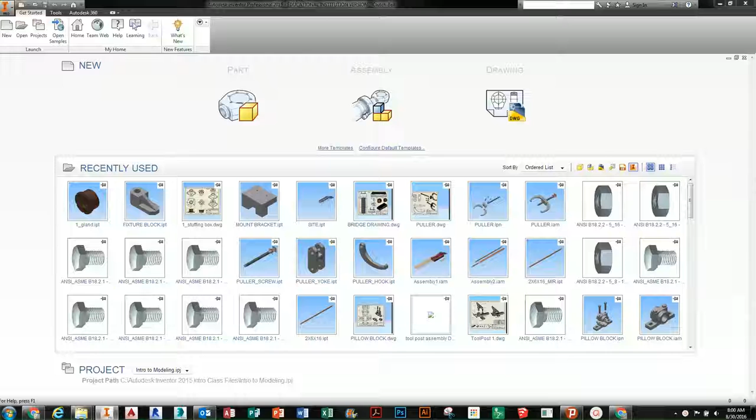Alright, today we're going to look at practice 17A and 17B, assembling an engine. And what we're going to do is start with a standard inches assembly file.

So we're going to go Start, New, we're going to find our assembly, and it's going to be standard inches right here.

We're going to create, and we're going to place the rblock.ipt. So we're going to go up here, you should have place. Go into our engine assembly, and we're going to place the RBlock, it's the rotary block. And you'll see we bring it in. Don't do anything just yet.

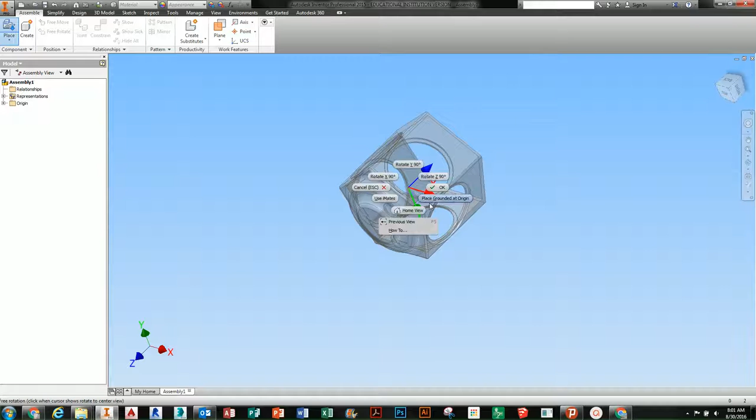What you're going to do is right click on the model, select rotate X90. Right click on the model again, say rotate X90 again. And then we're going to ground that at the origin by right clicking and selecting origin, and once we've placed one, we say OK. So we've got a nice basic grounded piece.

Now what we're going to do is, you've noticed when we did that, it has a pin on it. The pin on that little folder means it's grounded at the origin.

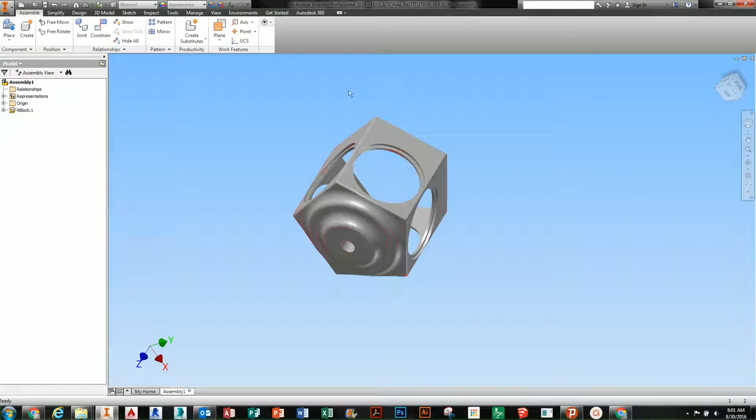So the next thing we're going to do is we're going to place the cylinder, the rcylinder.ipt, and we're going to rotate the X90 twice and place it just to the side. I'm going to right click to flip it once, right click to flip it again, and I'm just going to place it over here, sort of how it looks in the book. And then I'm going to say OK.

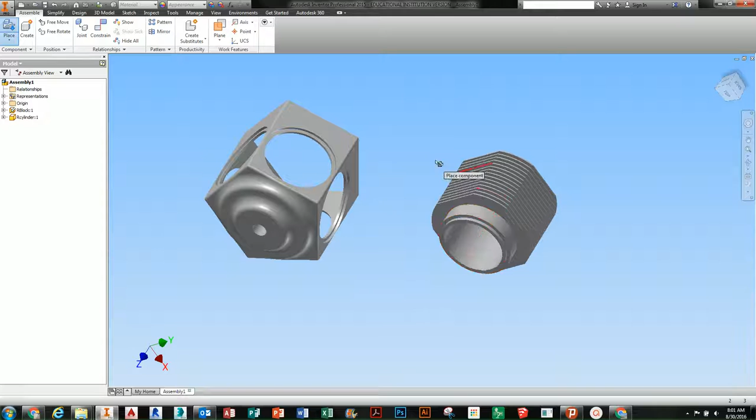And the next thing I want to do is I'm going to go to the Assemble tab, right under the Assemble tab, and I'm going to click Joint. When you click Joint, it shows you this kind of dialog box. And what we can do is turn this little guy on and off to toggle that dialog box.

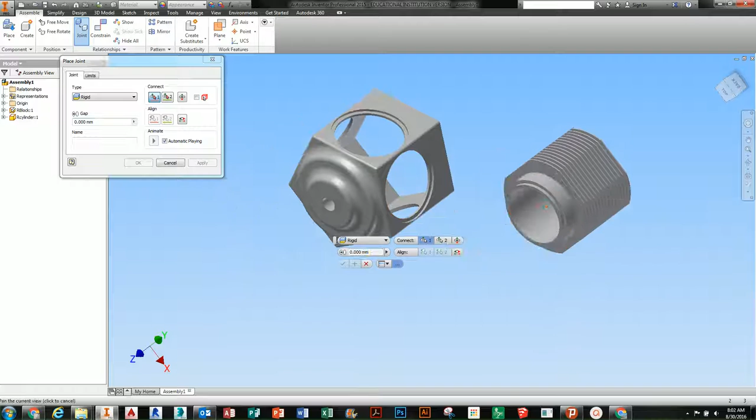So we're going to select a rigid joint, and on the R cylinder component, which is the first reference, you always click what you want to move first. We want to move the cylinder because this is grounded, it's our base.

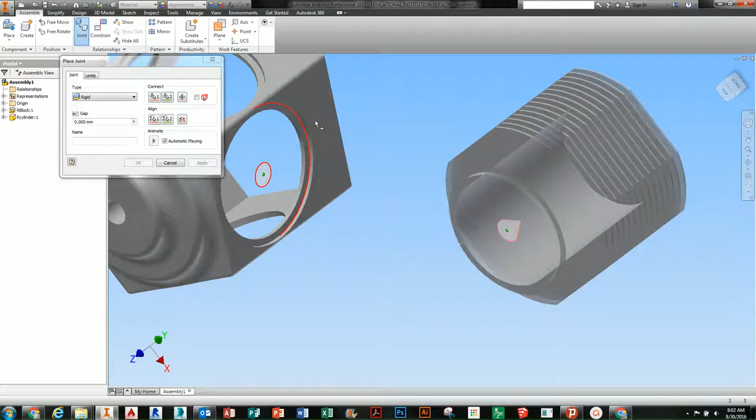We want to move the edge of this lip right there, and we want to move that to the edge. Oops. And now if something happens, you just undo it and then do it again. That's going to happen from time to time.

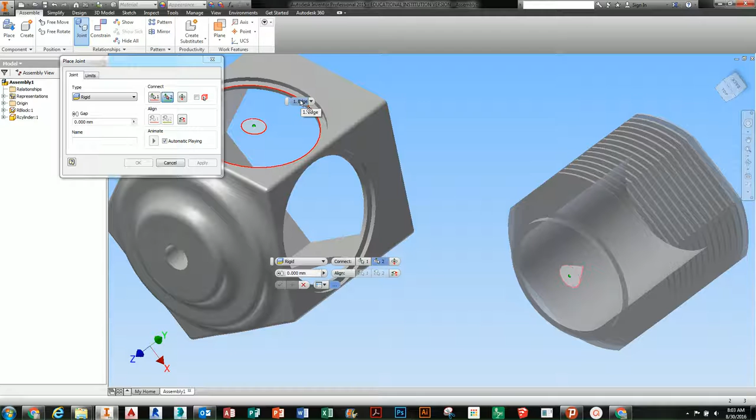We go back to our rigid joint. We're going to click that edge to this inner edge. This is where you got to really pay attention. And we're going to move that there. Now notice that should be flipped. So what we do is click off there, and that will flip the dimension.

And then we can say OK, or check the checkbox in the mini toolbar. I always keep my bigger dialog box open just in case.

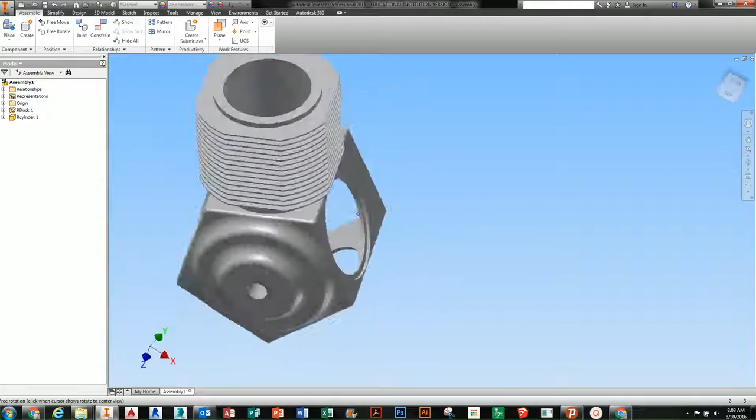Now, the next thing we're going to do is, notice next to our rigid, our R cylinder, when you expand the part, you get in a rigid joint. Because if you ever want to open that back up, you can always double click and take a look at the joint itself.

So now the next thing we're going to do is we're going to go place the crankshaft and the master rod. So you're going to hold Control on your keyboard and select master rod and select the crankshaft, and say OK. Now notice both components come into the assembly.

And we're going to right click and rotate X90 twice. All that does is put them over here to the side some. We're going to just place them over here, and say OK once. We're going to go back and we're going to place the R block.

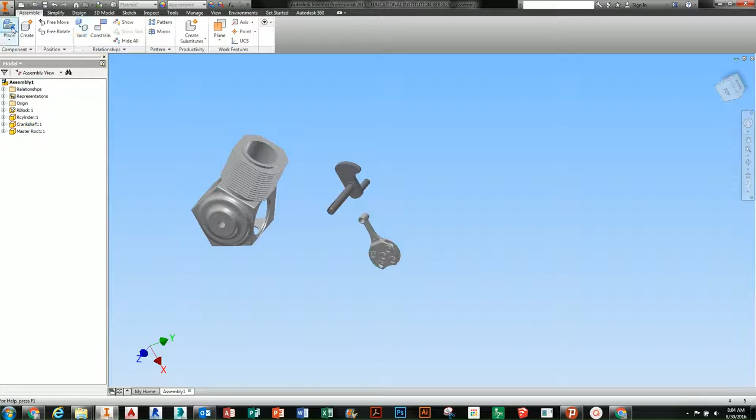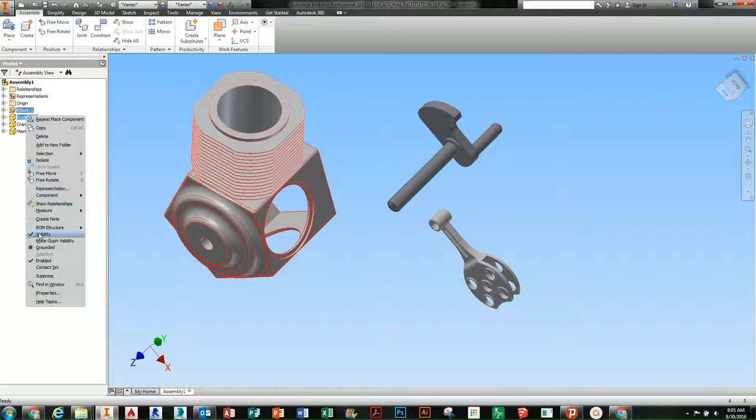Actually, what we're going to do is we need to first edit this assembly, so we're going to hide some of this stuff for the meantime. So if we go over to R cylinder and R block and hold Control down and pick both of those, you can right click and turn off the visibility. Notice this check mark here. So we can go and just focus on this sub-assembly.

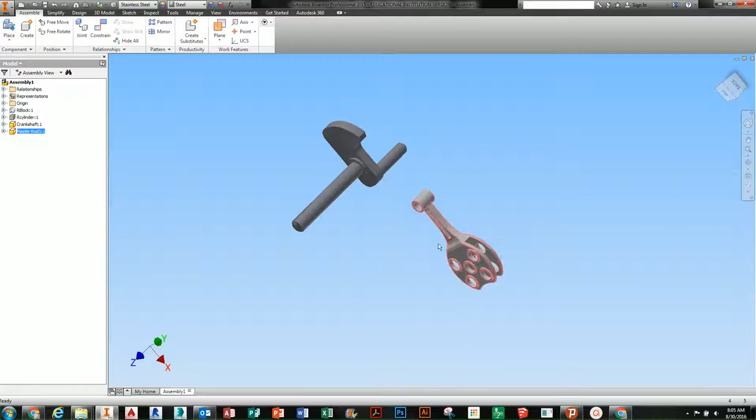Now we're going to hold down the left mouse button on the master rod component, which is this, and notice we can move it around. What we're going to do is try and move it sort of like they show in the picture, and that's sort of like how they have it.

And we're going to go to the Assemble tab, and we're going to click Joint. We're going to click a rotational joint. And the first thing we want to do is select on the master rod.

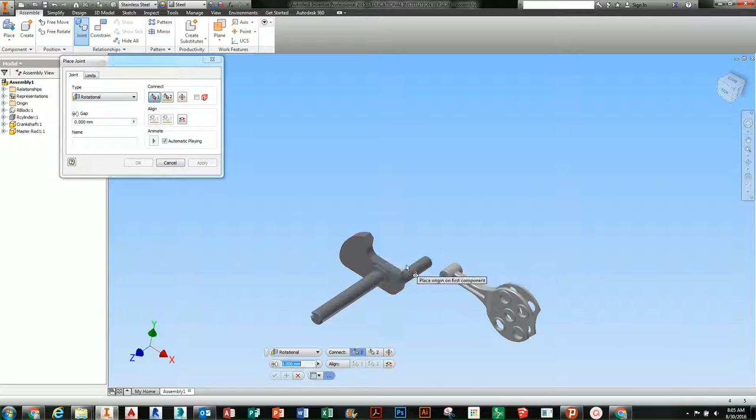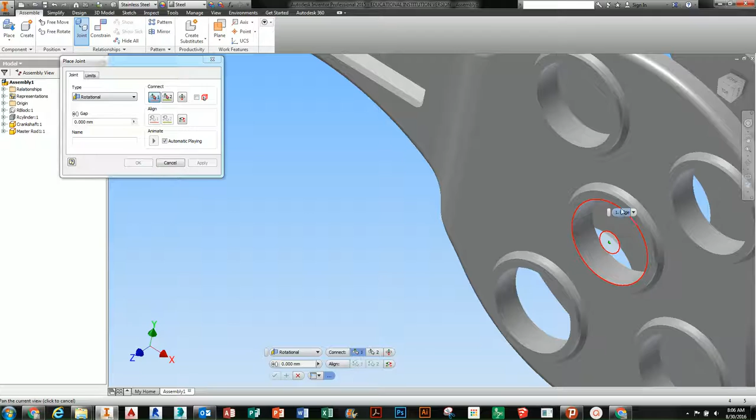Right, the master rod is here, and we're going to select this edge on the outer ring. Right, there's this edge here. Let's try this one. We're going to move that to the center point reference here.

And what that does is make a rotational joint around there. Now once we've made that rotational joint, we're going to say OK.

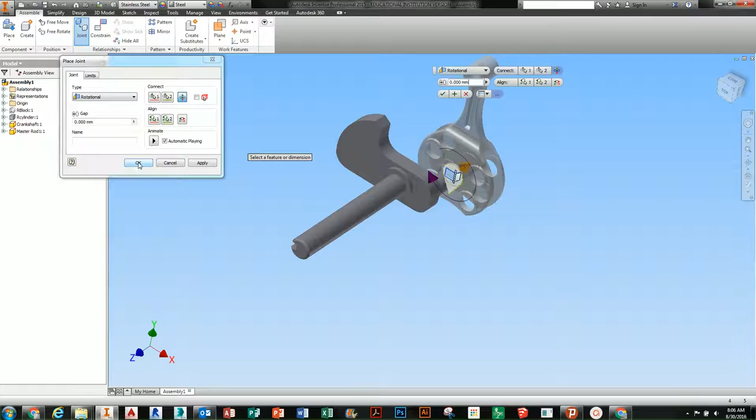And then notice once we've done that, you get a rotational joint underneath your crankshaft and master rod. Now we could flex that to make sure it doesn't change. Alright.

Now the next thing we're going to do is select the crankshaft in the graphics window or in the model browser, and we're going to ground that component. So let's go to the crankshaft, right click on it, and go to grounded, and what that's going to do is create a parent to this master rod.

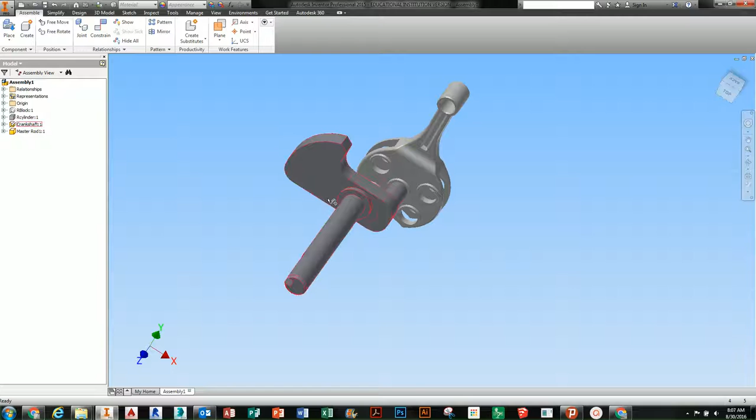Now the next thing we're going to do is select the master rod component and make sure that it's still got some of that rotational freedom. So what we did there is we anchored this guy so that this one knows to spin around the other one, right? It creates a hierarchy between the two parts.

So now let's go ahead, we're going to place an instance of the piston head pin and the piston head. I'm going to hold control and grab both of those and place them off to the side.

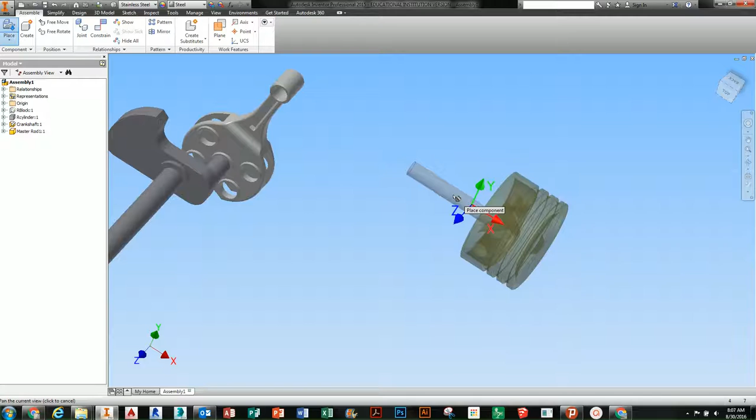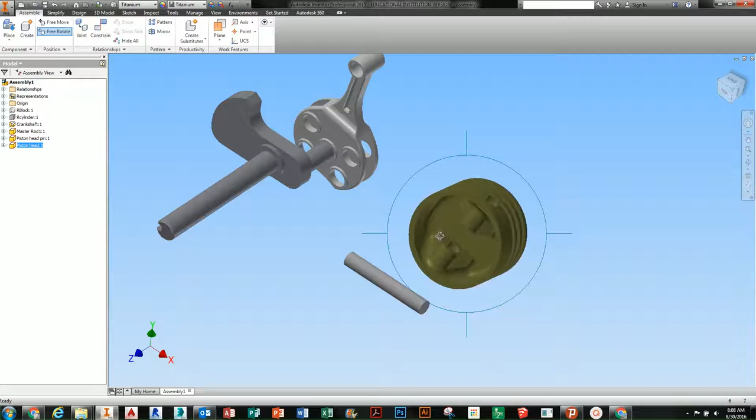And I can rotate them a couple times. Say OK. Notice my pin's over here. And if I don't get them how I want in the parts, I can use a quick free rotate to kind of make it look the way we want. Then I hit escape, and then I can do a free rotate, and we can turn this guy to be looking sort of how they want.

Alright, now once we've got that, we're going to go to joint and select a rigid joint. And what we're going to do is select the midpoint of this pin, and then we've got to place it between this cylinder that runs through here. Now this is where you got to be careful, because we want to right click in the graphics window, and we need to place the center of this between the center of those two surfaces. So we go between two faces, click that face and that face, and then we're going to say apply.

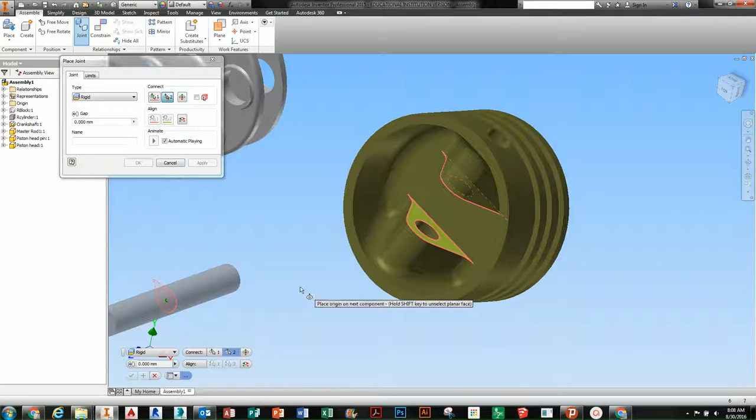And notice it applies those, slides the pin in between as I click to complete the joint.

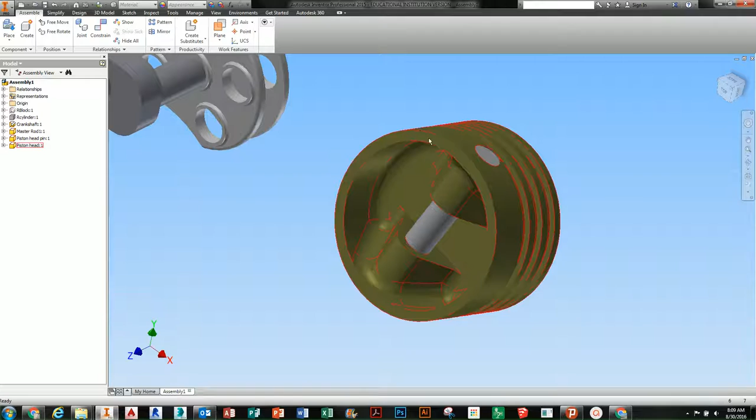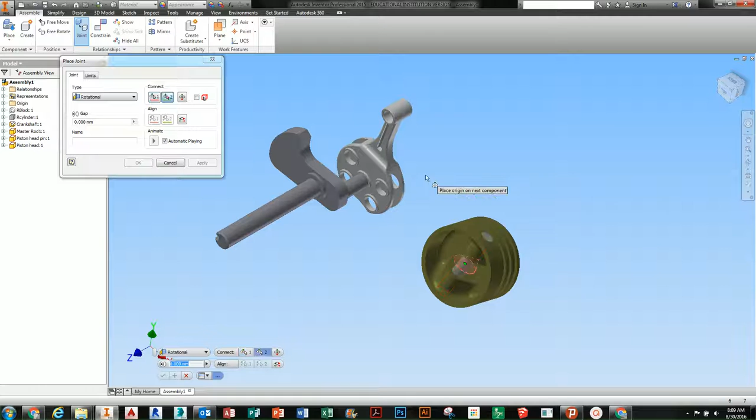Now the next thing we're going to do is a rotational joint that's going to attach this piston head and pin to the top of this master rod. So I'm going to go to joint, select type rotational, and I want to first select this center point of the piston pin again, the piston head pin, and then connect it to the center of this surface, this object.

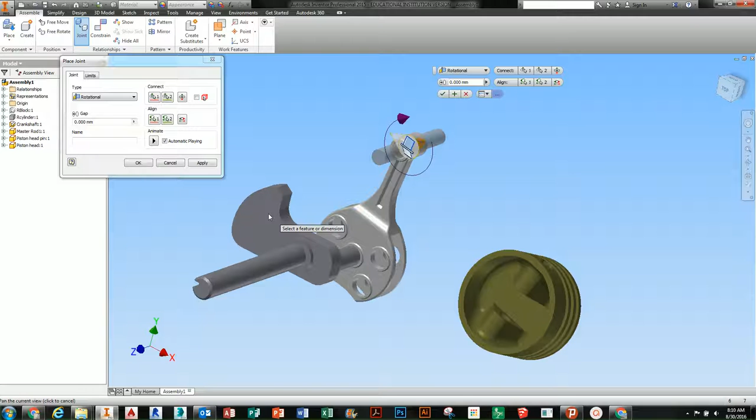Now notice when I moved that, it broke the reference between the two, until we say OK. Now once we say OK, you notice I get my component back in shape.

Now select the piston head. We notice it's got some freedom there. It can rotate anywhere it likes.

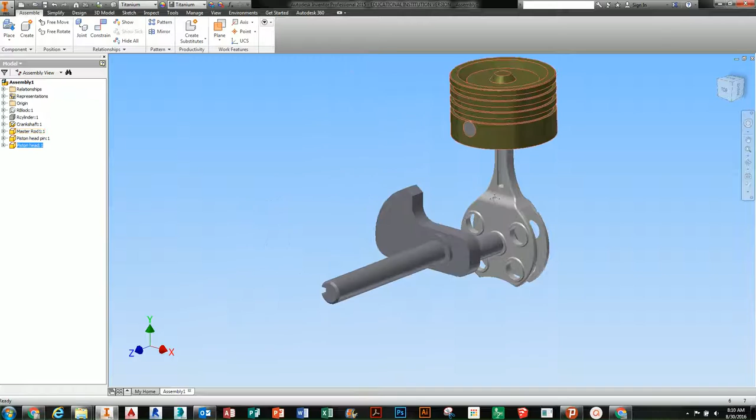Now let's go and turn back on our block, right? That block that we hid back here a long time ago. We're going to hold Control, pick both of those, and turn on our visibility.

Alright, now we're going to select the crankshaft component in the model browser, right click and clear the grounded option. So where we grounded this guy, this crankshaft, we're going to unground it, so now it can move around freely, because it's going to need to be added to the assembly.

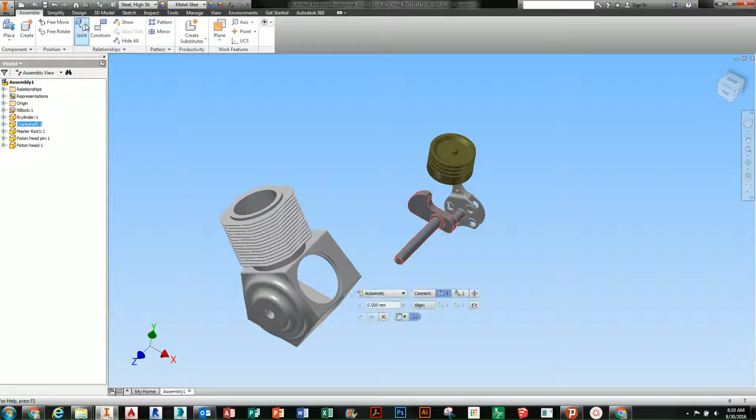So we're going to click Joint, and this time go Cylindrical Joint, and select the center of this ring on the outer edge, right? So we're picking this edge of the piston ring.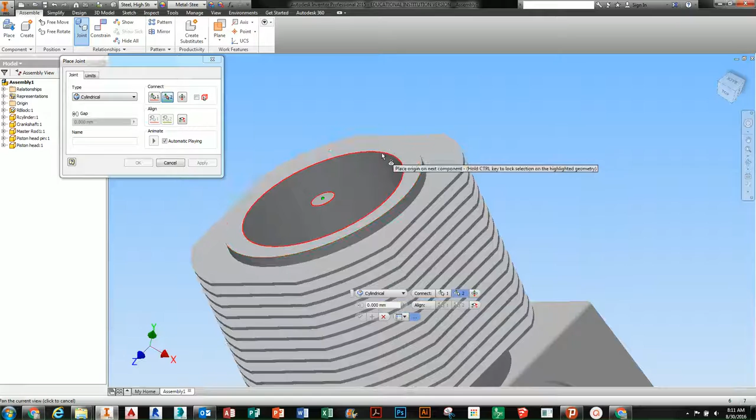Wait, we could do this one. And we're going to move that to match the outer ring here. And when we do that, your piston aligns. We check mark, say it's okay.

And then what we do is we just check that this piston doesn't go anywhere, right? This thing's going to break everywhere, but we'll fix that momentarily.

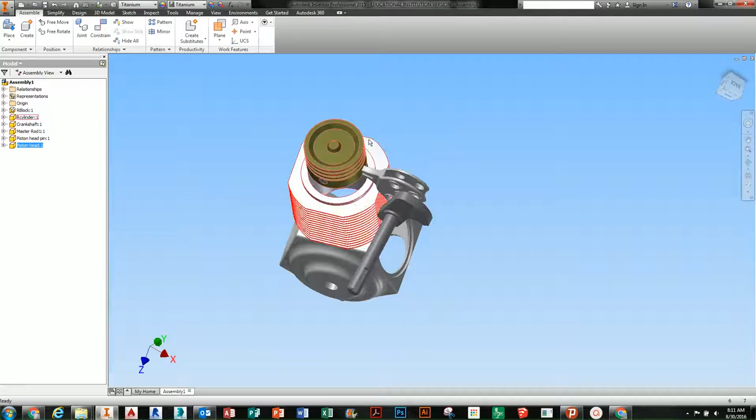Alright, now the next thing we're going to do is click Joint and make a cylindrical joint on the crankshaft component, which is this edge here. We want this edge to meet this edge. Let's see what we get. So we create this kind of condition.

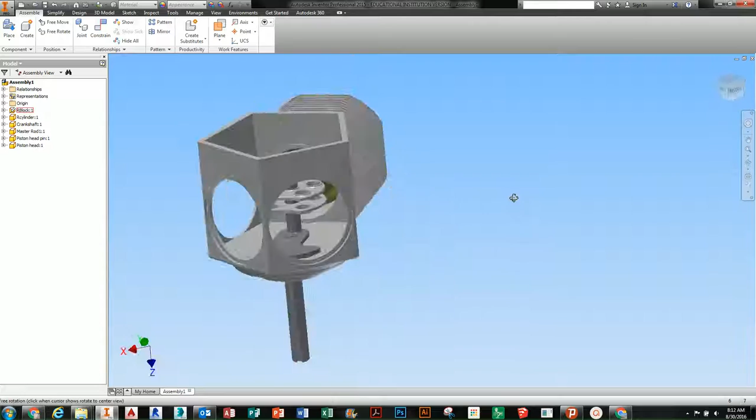And we want to say check mark. Let's see what we get. There we go. Now our piston is locked in, right? Our crankshaft is locked in.

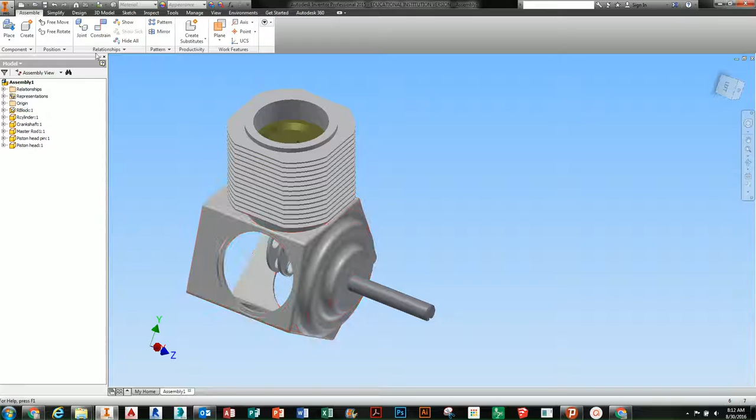Now the next thing we're going to do, and we're always going to drag and double check, make sure our degrees of freedom are appropriate, right? This thing should be rotating or doing something of the sort. And we're going to place an instance of the hub and shuttle into the assembly. So let's go place. I'm going to come back here, pick hub and shuttle, and I'll place the hub off to the side.

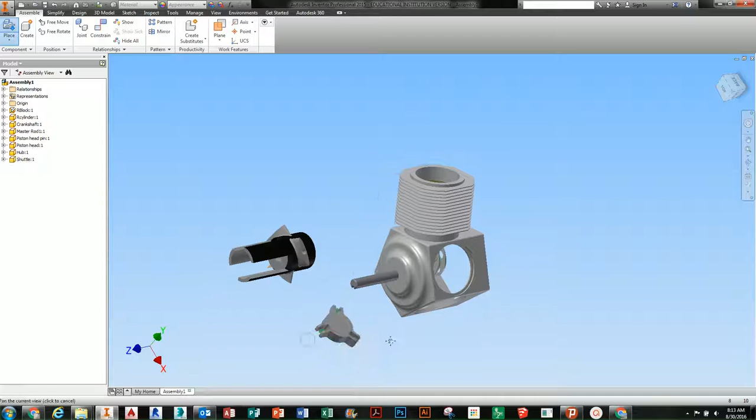Let's see, the picture sort of shows it like this. And I'll say OK, and then I'll place a copy of the shuttle, and I'll rotate that a little bit to make it look like they did in the picture.

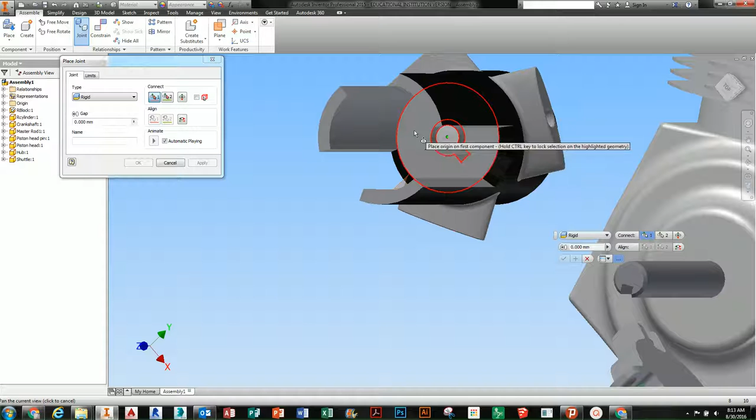Now we're going to make a rigid joint. On the hub, on the first reference, which is this thing, the hub, we're going to select that center surface right here. We're going to move that face to match the end of our assembly here. And so what that does is creates a joint of the hub to the crankshaft.

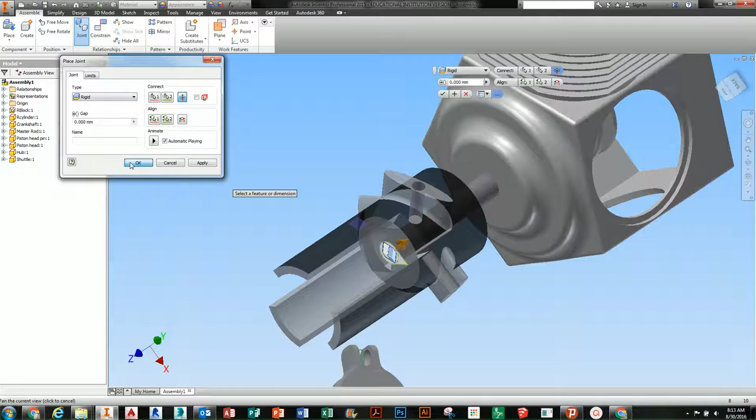Now we say OK. And we can actually notice that now this cylindrical spin activates the piston.

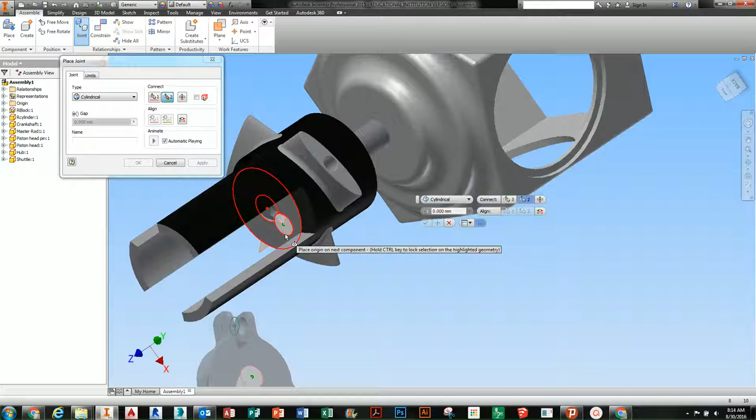The next thing we're going to do is initiate the cylindrical joint connection. Joint, cylindrical. We're going to click on the shuttle right dead center on this face, and we're going to move it dead center to the hub. So that would be just like that there. Notice it just moves it along.

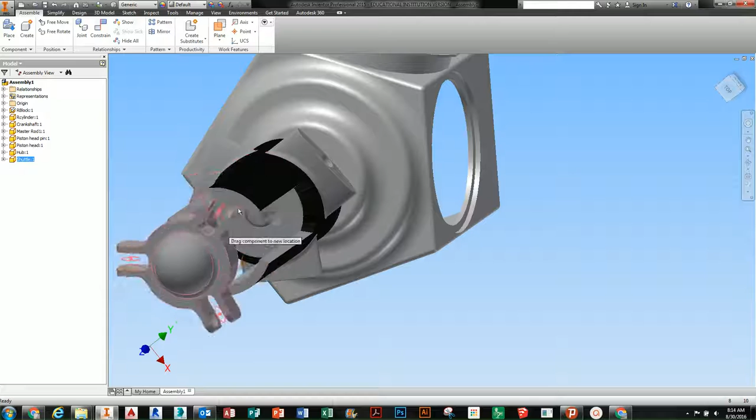We can say OK. And now notice this is clashing, right? Because this material is cutting into the other material, but we can still spin it, and this can spin too. We'll fix that momentarily when we create some additional constraints.

So now what we're going to do is make a few constraints instead of joints. In the Assemble tab, we're going to go to Constrain. Your constraint dialog box looks as such, and we're going to click Angle Constraint.

And what we're going to do is remove all that rotational freedom from this shuttle component. We don't want it moving around, we want it to sit still. So we're going to go angle, and then we're going to click directed angle.

And we're going to expand our hub component over here. Notice there's a work plane in here already. That work plane is what we're going to select first. And we're going to align that work plane to the origin of the YZ. And now what that does is create that angle constraint there.

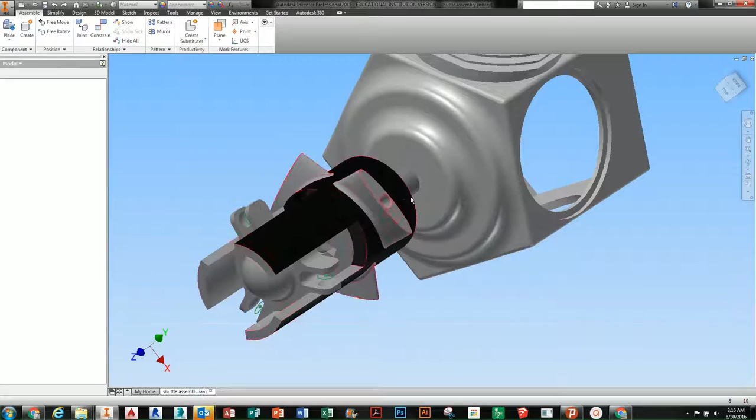Alright, so picking back up where we left, before we had a little audio malfunction there, and that will happen from time to time when you run too many apps at once, for instance screen capturing with all of the assemblies. But what we're going to do here is we're going to create a constraint.

We're going to go angle, directed, and we want to first open the hub and click work plane 1, and we want to constrain that to the shuttle's origin YZ, and then we get the same constraint, and then what we're going to do is hit accept, or change that to 180, and notice how it frees up our alignment.

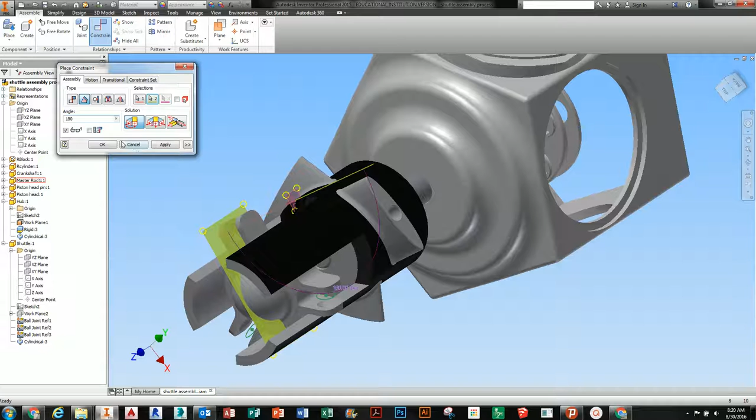Say OK. Now notice this will move together, right? So this pops out, but it has limits. We need to break those limits.

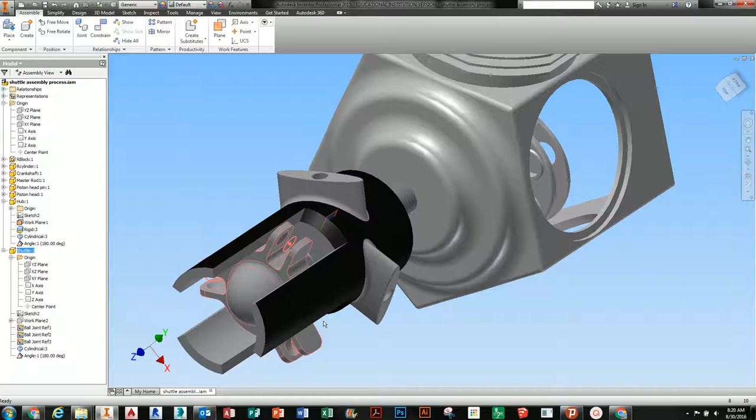So the next thing we'll do is we'll go into and expand the shuttle. So the shuttle has a limit to its range of motion on the hub, right? And that's based on this cylindrical connection down here. So what we're going to do is right click and we're going to edit that cylindrical connection.

And then we're going to open up and edit the limits, right? The limits are up here. We want to change the limits in the linear area to start at 1.9 inches.

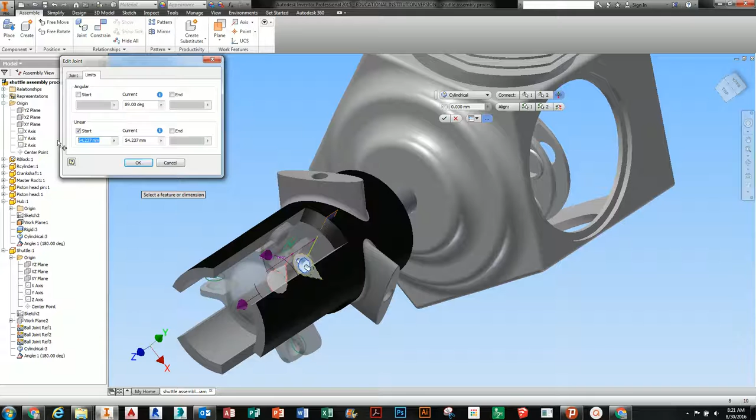And let's make sure our units are good here. Let's go to Tools, Document Settings. Let's double check, change our units back to inches, say OK. Go back to our assembly. Open up our cylindrical.

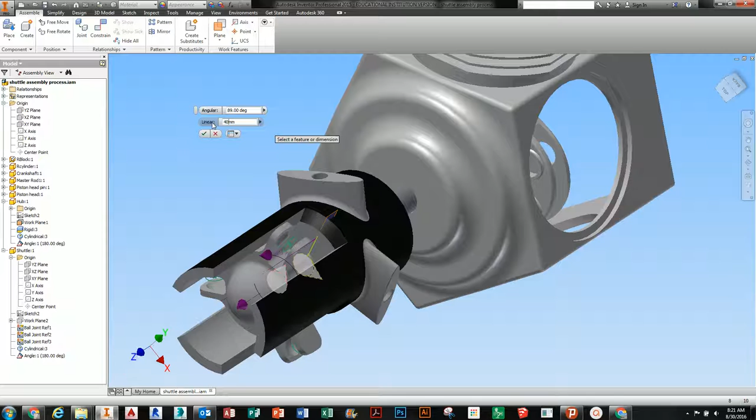Joint, and we're going to change our linear, and if it's 1.9 inches we'll make it something close to that. Let's go to edit, that's what we need to be in edit. Start, there we go, we want this to be 1.9 inches. We want it to go to end at 4.3, so that keeps it from moving back and forth.

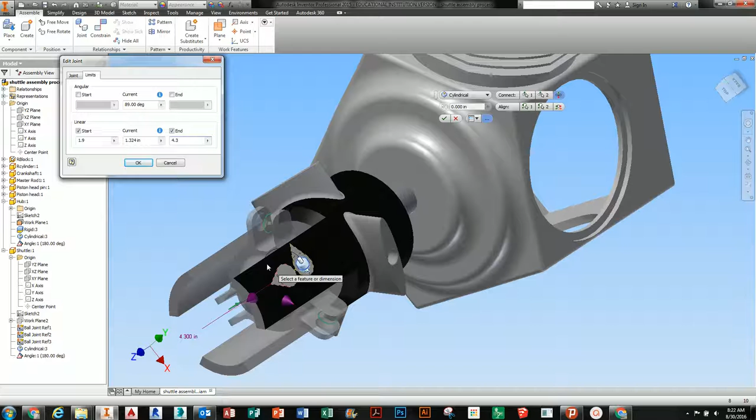And we'll say OK. Now what that does is it lets it move to the extents of each face there. So now we've checked that.

We're going to place an instance of the Prop Blade and the prop con rod into the display, and we're almost done. I'm going to go place Prop Blade, place that.

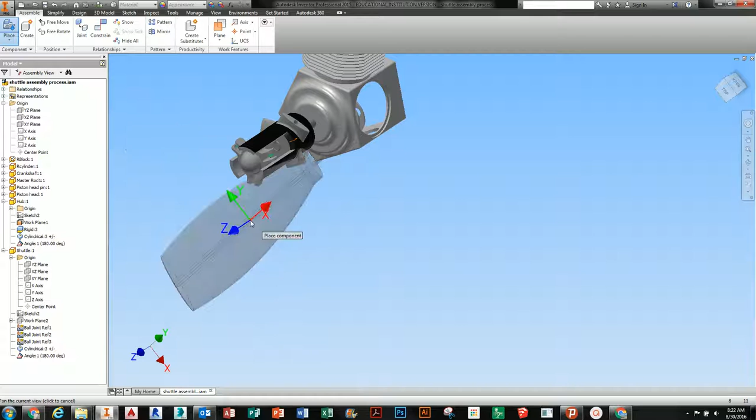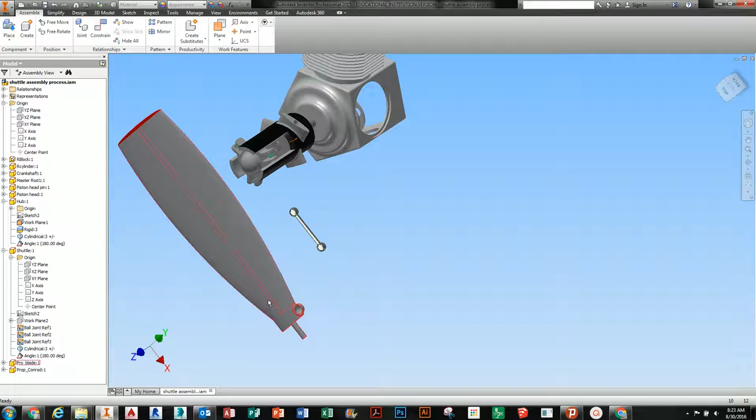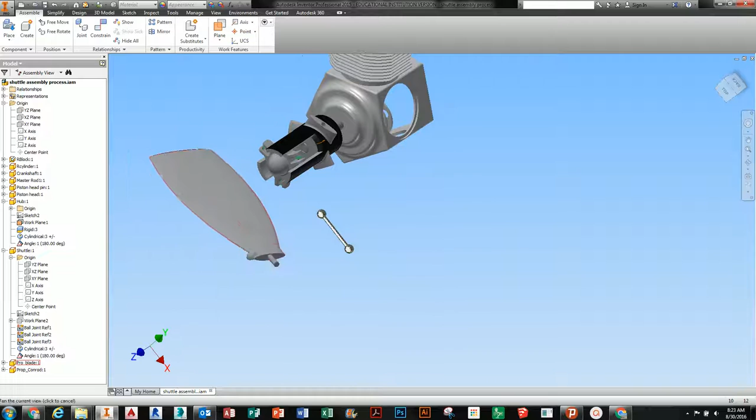And then I'll hit escape. Now what I'm going to do is create a joint of the fin, this face of this fin to the face there. So I'm going to go joint, make it rotational. I'm going to select this face here, and move that face to here. Then we'll select joint, and we'll say OK.

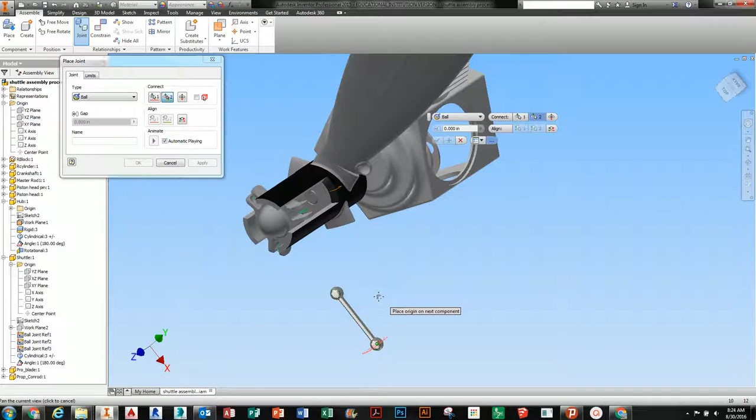Now we're going to add a ball joint to the blade and the con rod. So first we go joint, change this from automatic to ball. We're going to pick this end, the center of the sphere, and place it centered on the sphere that shows up when you create the cup there. That creates a nice ball joint, and we'll say OK. Then we can drag this guy so it clears up a little bit.

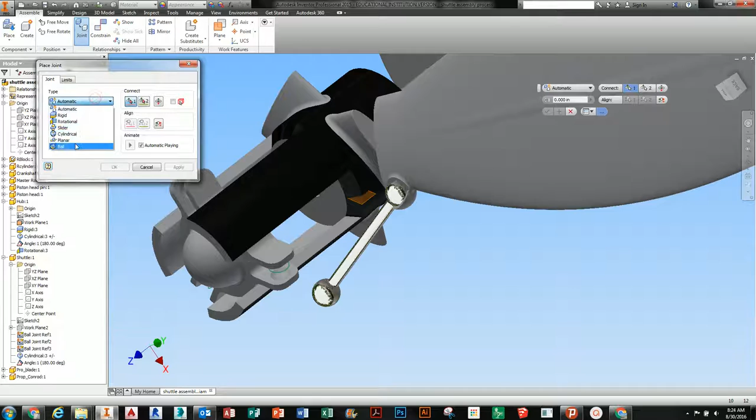Now the next thing we're going to do is add another ball joint between the shuttle and prop con rod. So we go joint, not constrain, we go ball joint, and go from this guy to right in here. You want that sphere to line up, not an edge. And notice it's off center, so we've got to cancel that. We're going to do it again until we can figure out how to get that to be centered as a ball joint.

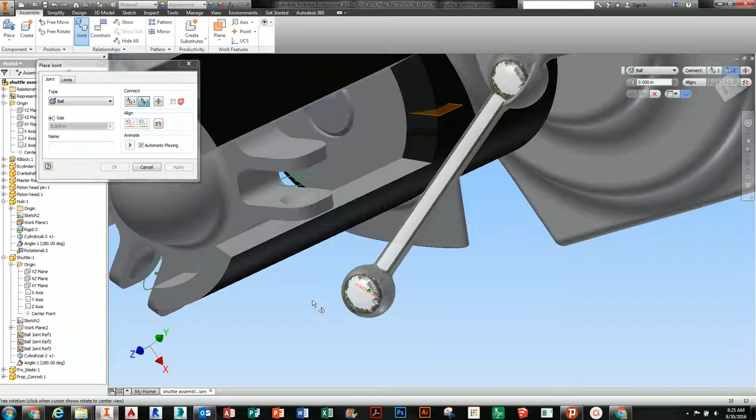Let's see if we can do a joint between two faces. It's still not the sphere. So hang on, we're going to keep playing with this till we get the sphere to line up. So we go ball joint.

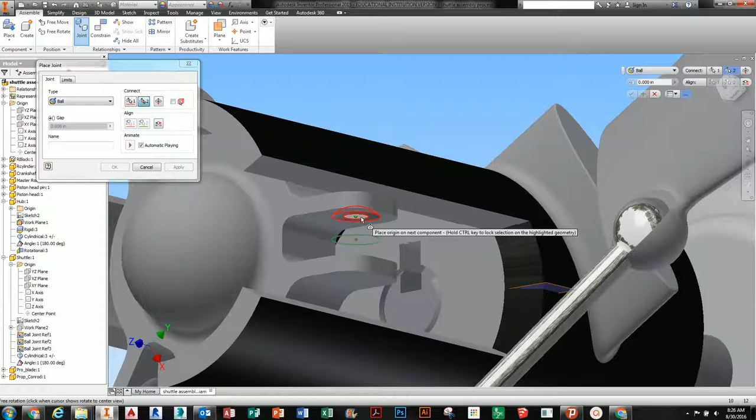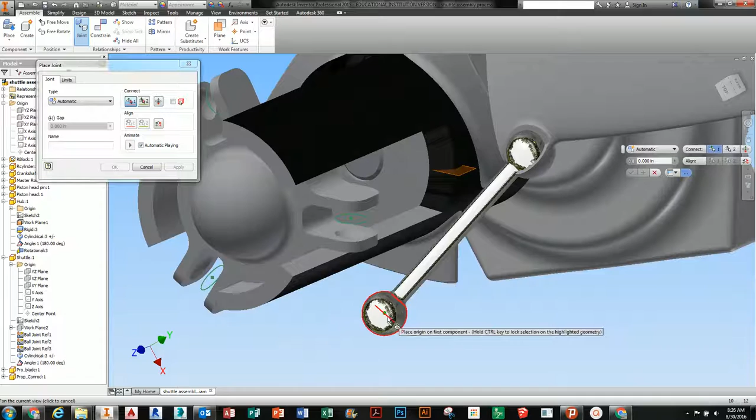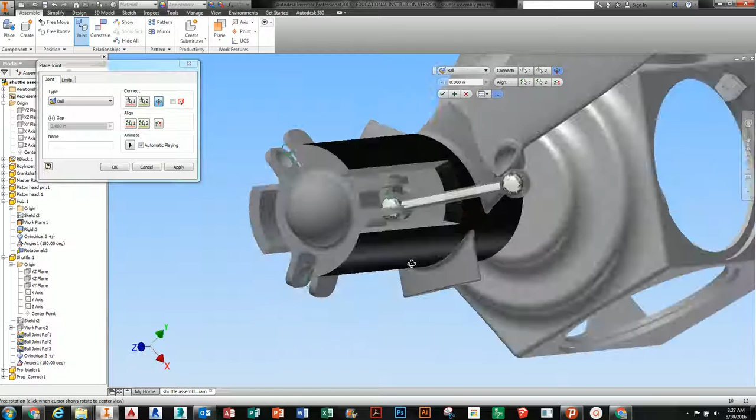Let's keep playing with that. And even when, I'll undo that to show you, it was working and I just didn't hit accept the whole time. So if I just go to ball joint, select here, and then select inside that sphere, it'll move it in what looks like a poor manner, like it's falling through the object. But once you hit OK, it'll adjust all of it accordingly. And now we get the wing showing as it should.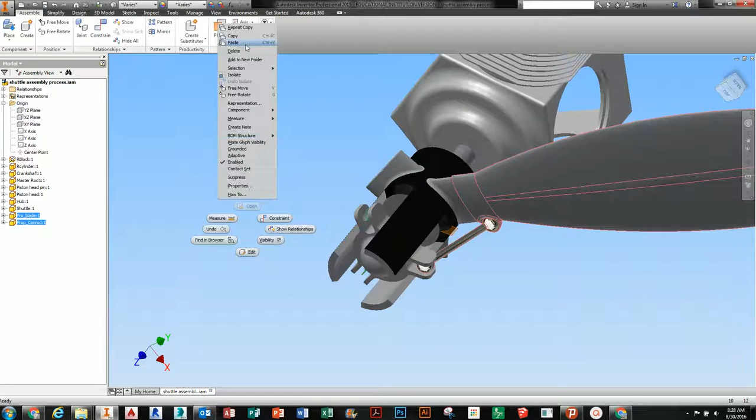So what we'll do is right click in the graphics window. We're going to take these back down. We're going to select our prop blade and our con rod, right click, say copy. Then right click in the graphics window and say paste, and that brings this stuff out here, still joined together.

And we're going to do the same thing for the other wings. So I'm going to go joint, rotational. Remember, that's rotational from this face to this face. I'm going to accept that.

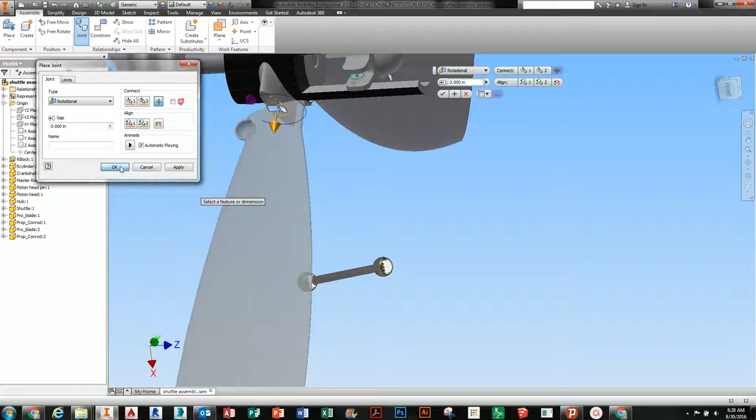Then what I'm going to do is flex this wing around till it gets kind of where we want it to line up. And I'll even move that ball joint out of the way. Then we're going to go joint, ball joint. I'm going to move the center of this one to there. Say OK.

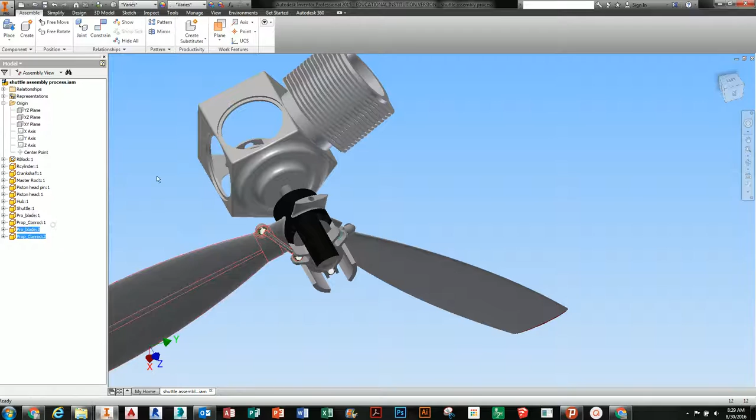I don't need all that animation. That'll let us have the wings flexing accordingly. We can come back later and actually flip these orientations, but for now we'll just get these assembled. So now I'll go back, add the prop blade con rod, copy, paste. I'm just right clicking, hitting paste and copy. Move these out of the way.

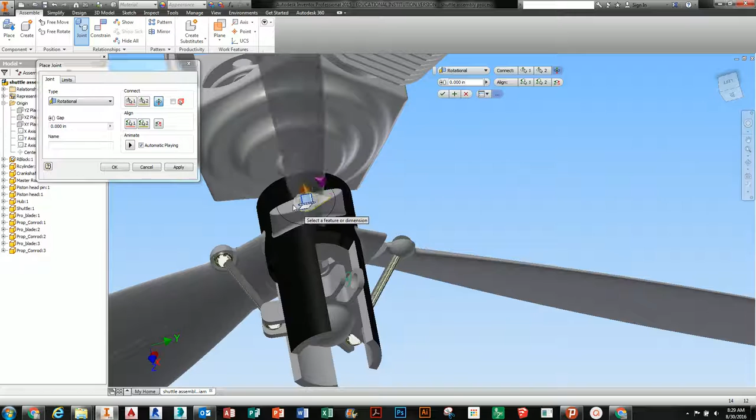Let's do our joint, rotational. I'm going to move that face to that face. We're going to accept it. We're going to flex it around until it looks sort of right. We'll have to come back and flip that guy.

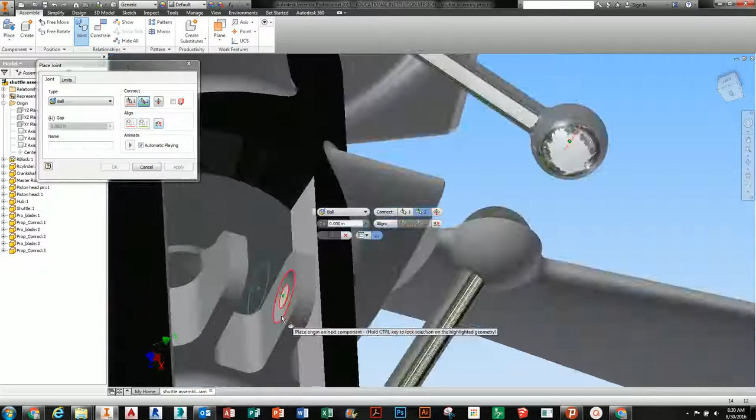But the next thing we're going to do is add another ball joint from here to there. Say OK. These are kind of flipped around if you notice, and we'll take a look at those in a little while. But for now we've completed all of our basic assembly.

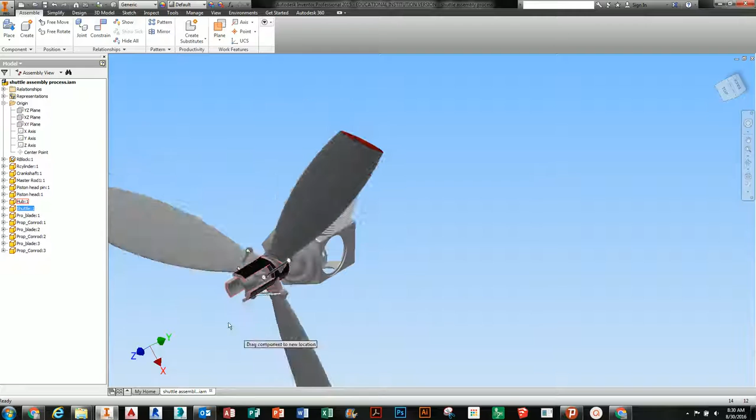We can just pull this hub here, and it flips all around. We can spin this thing by dragging it. We can also activate the whole assembly by just pulling on the piston. And what we're going to do next is add these in a circular array all the way around.

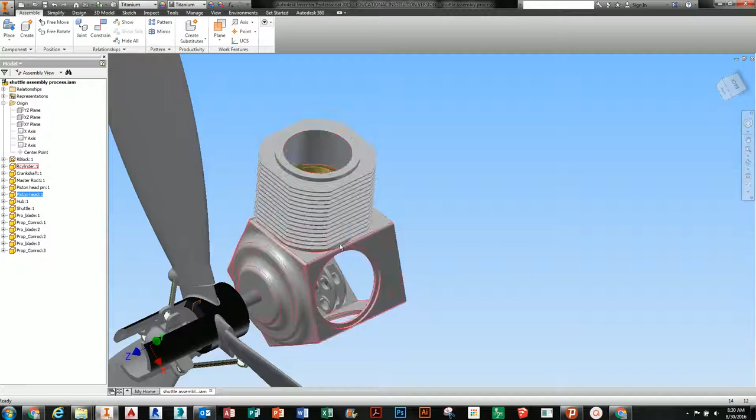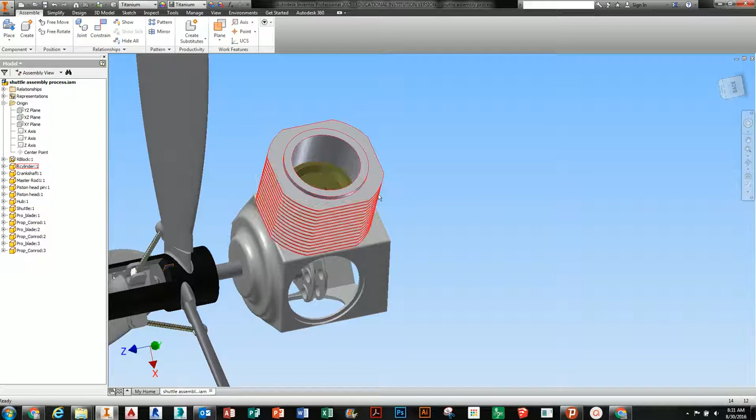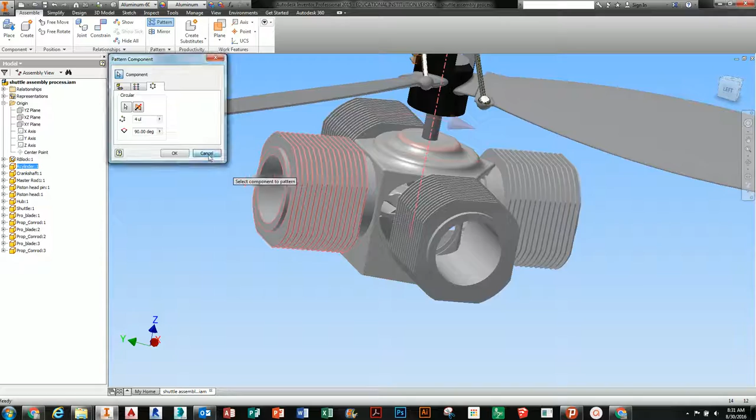And one way we could solve this is if we wanted to just do a pattern, that might work, though it's a little off center. So we can copy those around as you'd like, but that's an optional challenge for you to try to copy and apply those same joint connections. Remember, use the hints to copy paste some of that functionality between.